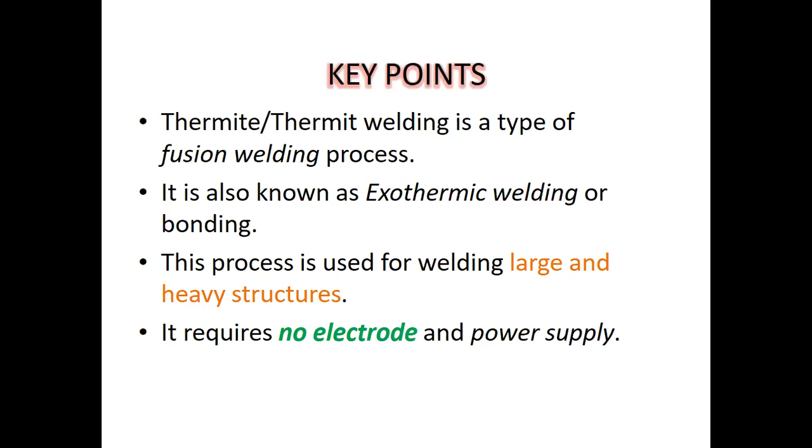The principle is, in this process, the welding is done by pouring superheated liquid steel around the parts that are to be joined. And that liquid steel is brought to that superheated state because of the thermite reaction. That is the first point to note. A short moulding process is to be done before welding. We'll see how that wax molding is done.

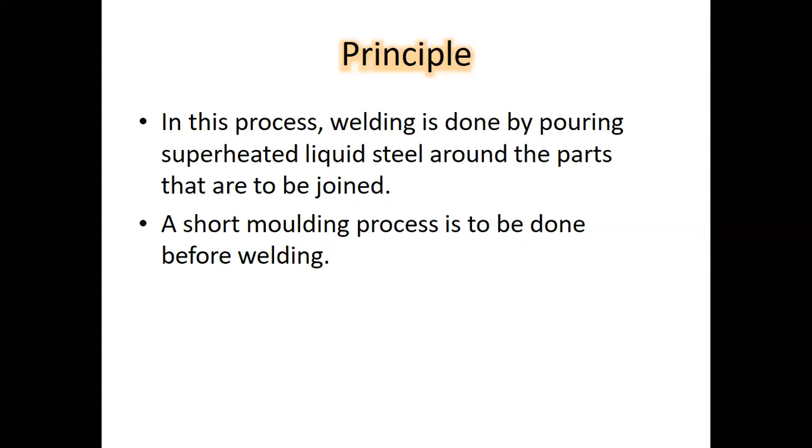The exothermic reaction is from a mixture of fine aluminum powder and iron oxide that produces a very high temperature on combustion, used in welding and for incendiary bombs. That is what is responsible for the generation of heat and therefore the high temperature. If it involves aluminum, the thermite reaction is also called the Goldschmidt aluminothermic reaction. Usually this reaction is triggered by burning magnesium ribbon in presence of barium peroxide. So the ignition material is magnesium ribbon in the presence of barium peroxide.

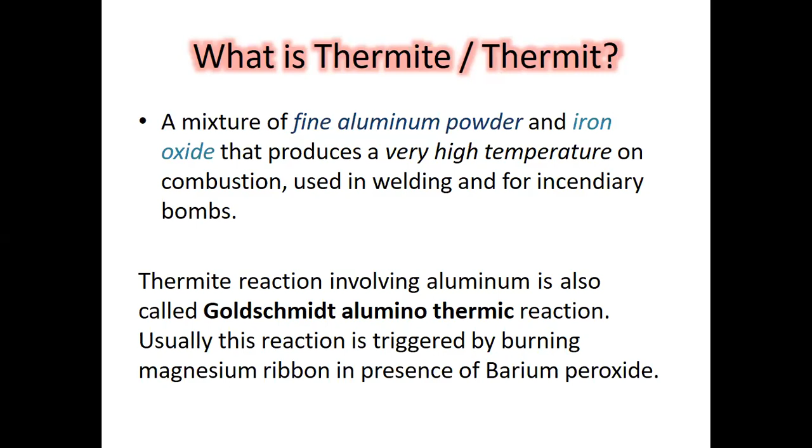As for the composition, you have by weight 75% of iron oxide and 25% of fine aluminum powder. That's the ratio, 1:3 by weight. We can also use copper or chromium instead of aluminum. Those are also possible.

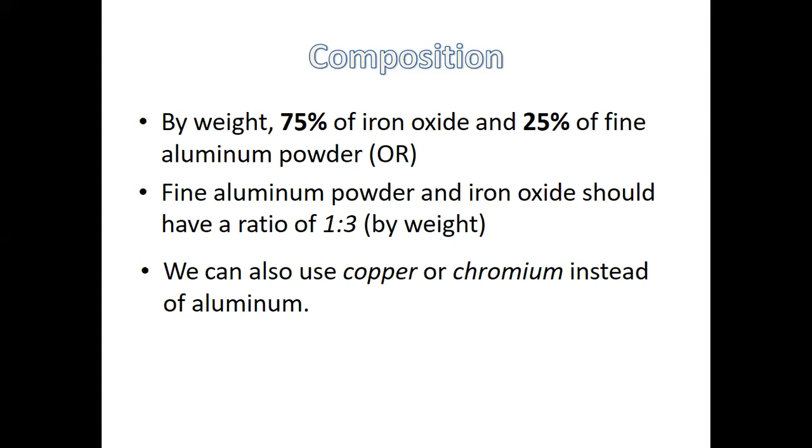As for the working, the ends of the parts to be joined are kept parallel with a uniform gap between them. For example, two rails to be joined will be kept side by side. We'll see in the next diagram that those two entities are kept right beside one another, and a uniform gap is maintained. Now that gap is filled with wax, which becomes the pattern. Molding sand is rammed around the wax pattern, and the pouring gate, heating gate and risers are cut. Once that wax comes out, the gap remains and will be filled with the molten metal.

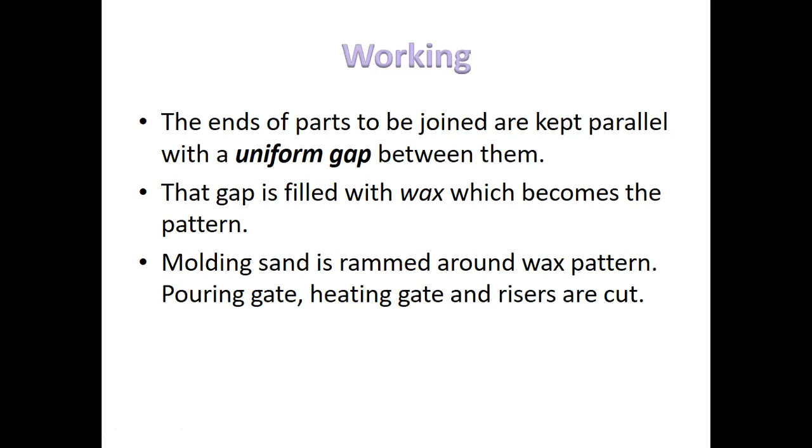You see here, this is your crucible, from which the superheated molten metal will flow in through the tapping pin. And this setup you have prepared is around this, which is to be welded. These are the sections to be welded, basically rails.

We're looking at a cross section of it. So if the weld is to be made around this section, then you have to have a mold right around this section. So you are trying to make these cavities so that the molten metal is given way to fill this space, and then the riser, just as we have in the casting, right? So we are trying to give it all the channels that are required, as we have seen, starting from the pouring basin, runner, gate, riser, etc.

And before that, you have this preheating gate, wherein using a torch, you are trying to preheat the setup, right? So that when this molten metal, which is at a very high temperature, enters here, there is a temperature gradient, and that would lead to cracking, etc. of the base metal. So to avoid that, with a preheating gate, we are trying to preheat the setup before the molten metal is poured in.

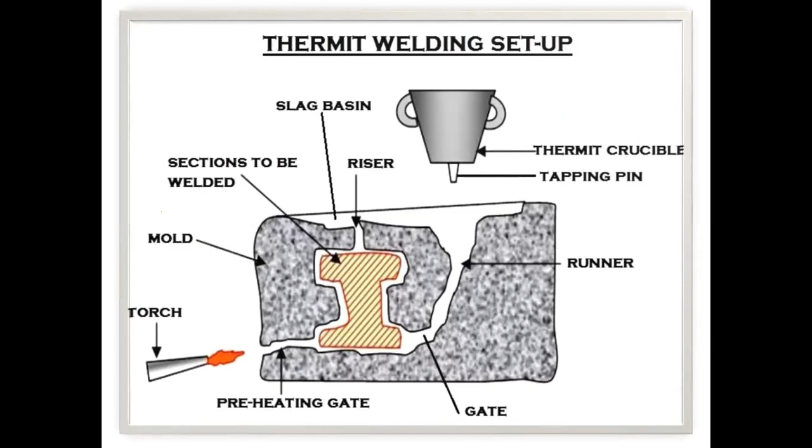Now, after the melting of wax, the weld joints are preheated due to flame, right? Then heating is stopped and the heating gate is closed. And therefore, no other external source of heat can come in except the molten metal from the top, as we have seen here. Okay.

Now, as for the preparation of thermite, you see how that mixture is prepared. So that mixture of aluminum and iron oxide in the ratio, as we have seen, 1:3 is placed in a crucible. Barium peroxide is added to the crucible. Barium peroxide arises by the reversible reaction of O2, that is oxygen, with barium oxide. The peroxide forms around 500 degrees centigrade, and oxygen is released above 820 degrees centigrade, right?

And the mixture is ignited using a matchstick or small magnesium wire. We'll see in that video hopefully that using either a matchstick or magnesium wire, to be able to ignite that mixture, you have to have some source. So that combustion takes place in the crucible. Due to combustion, thermite mixture becomes superheated liquid within a maximum time of 30 seconds. So that's how quick that combustion is, right?

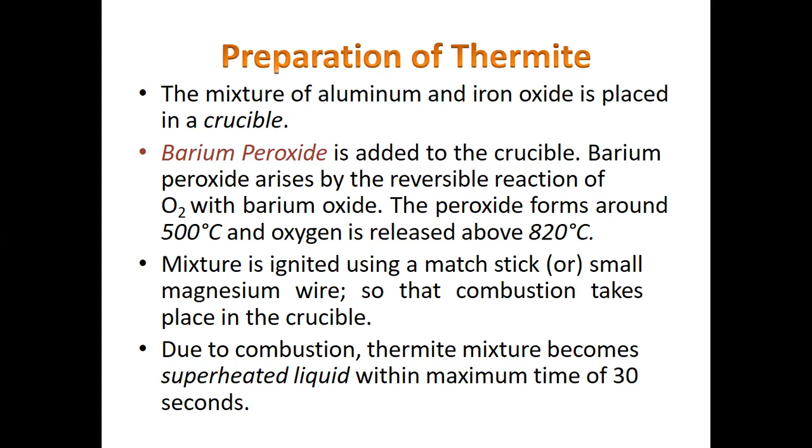That superheated liquid, which is pouring metal, has a temperature of around 2500 to 3000 degrees centigrade, or 5000 degrees Fahrenheit. The reduction of ferric oxide by aluminum is highly exothermic, and therefore the iron formed will be in the molten state. And aluminum is chosen as the metal since it has strong affinity towards oxygen, and its oxide, Al2O3, as we have seen earlier, is a highly exothermic compound. That's the reaction that is taking place.

And aluminum is reacting with this ferric oxide, right? That heat we are getting is actually our byproduct. That is our intention here, right? That heat is responsible for melting the base metal.

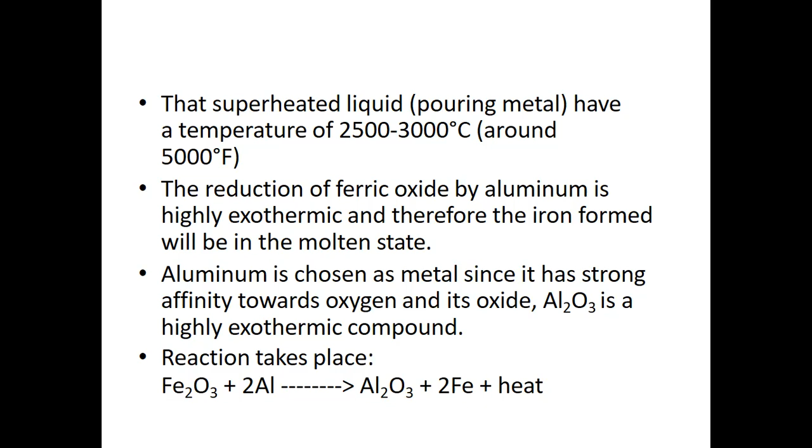As for the joining process, you have the crucible placed directly above the joint to be welded, as we have seen in the diagram. After preheating the joints, the liquid thermite steel from the crucible is poured into the mold between the gap to weld. The molten metal solidifies and the weld is completed. Once that crucible releases the liquid molten metal, it flows into that cavity we have created with molding sand, and it solidifies over time, and then the weld is completed.

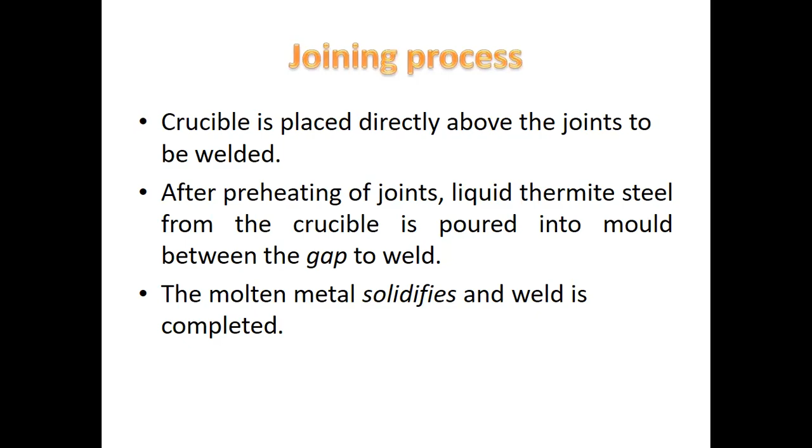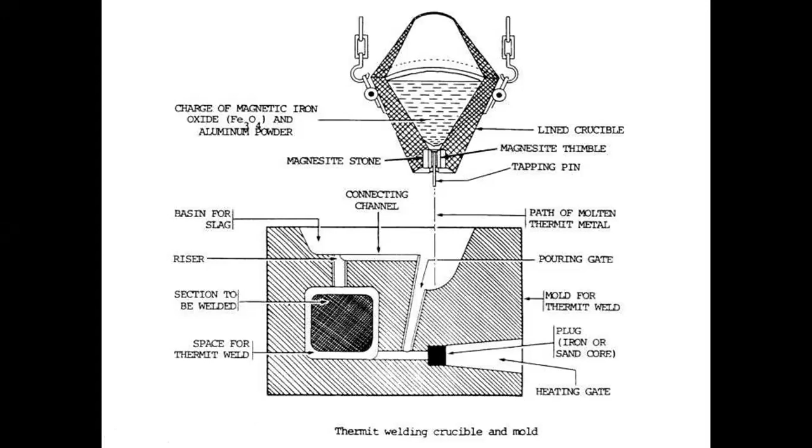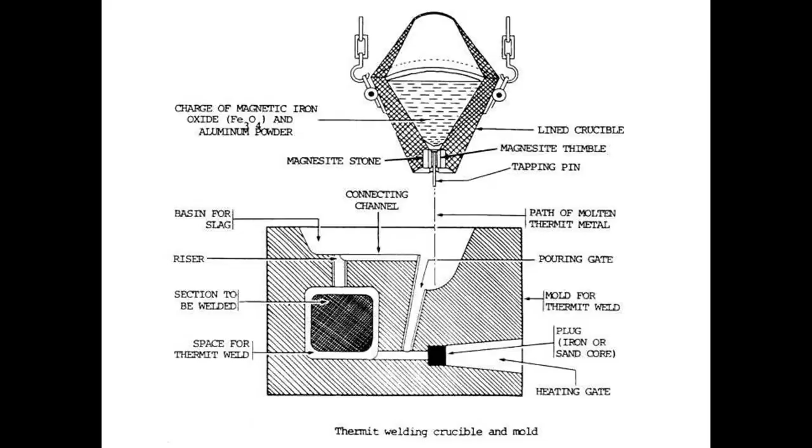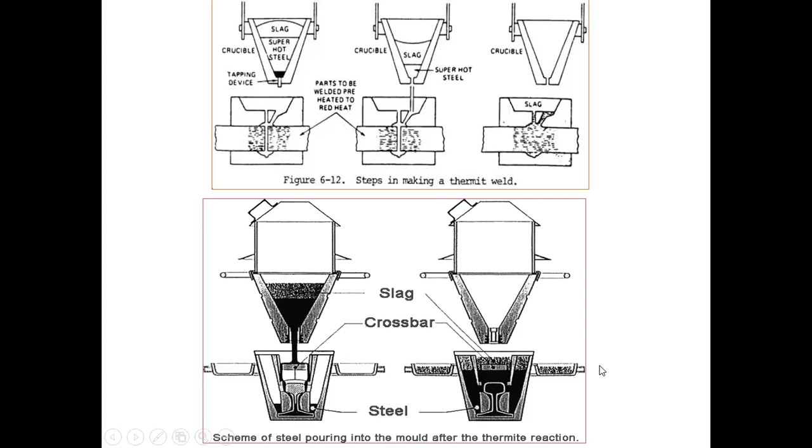As for applications, it is used to weld very large works. As we have discussed earlier, joining of rails is one example, pipes, even broken teeth on large gears, for example, those dam gears, if you have seen, they're quite big, right? So if there are broken teeth on those large gears, how do you weld them? With the help of thermite welding. Large framework also, like big structures, architectural structures.

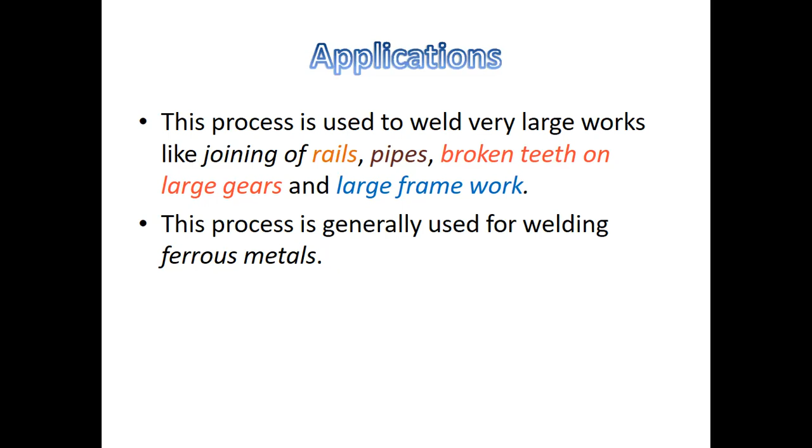This process is generally used for welding ferrous metals, right? Because the exothermic reaction that we have is able to achieve that temperature wherein the ferrous metal can be melted, right? So that comes off as a positive point. Advantages: as we have discussed, very large structures can be easily welded, which is not possible with other kinds of welding, right? You require more time and more filler metal. So here you are trying to compensate for that.

No power supply and electrode needed, as we have discussed. So this is very much suitable to be utilized in remote applications, remote areas wherein there is no power supply or it is very hard to get any electrode that is to be carried.

Disadvantages: skilled laborers are required here because it's a very tedious process. Manual, we can call it, it's not automated. So therefore skilled labor is required here. And it's a time consuming process, right? Very lengthy process. You have to prepare the mixture, you have to burn the mixture, you have to prepare the molten metal, and then you have to prepare all that setup here at the weld site, right?

All that gating system of, what do you call this, runner, gate, etc. And then once the molten metal is done, you have to pour it and then wait for it to solidify and then remove all that excess gates and runners, etc. once the weld is done, right? So it's a time consuming process. Doubts so far?

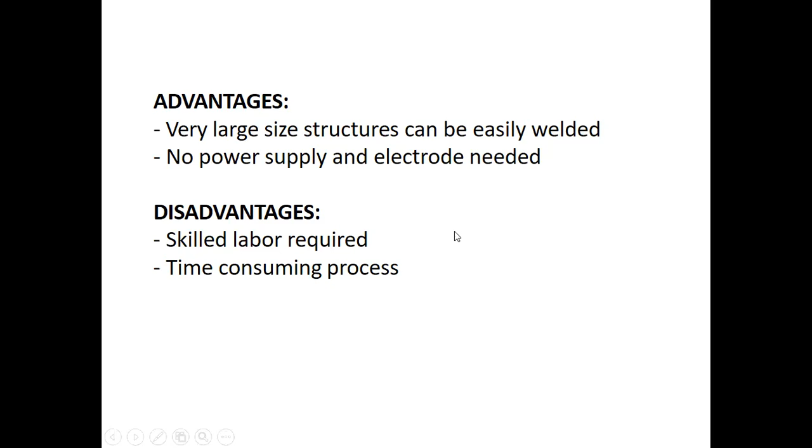Okay. Now let us have this video so that we can understand this process.

Able to hear the audio also? Okay.

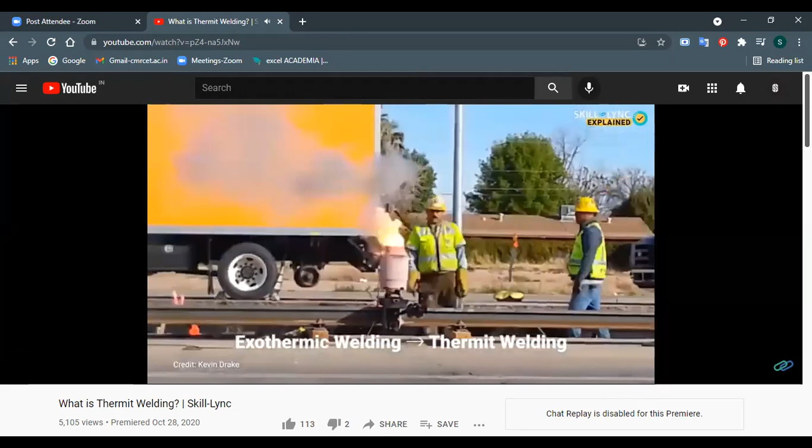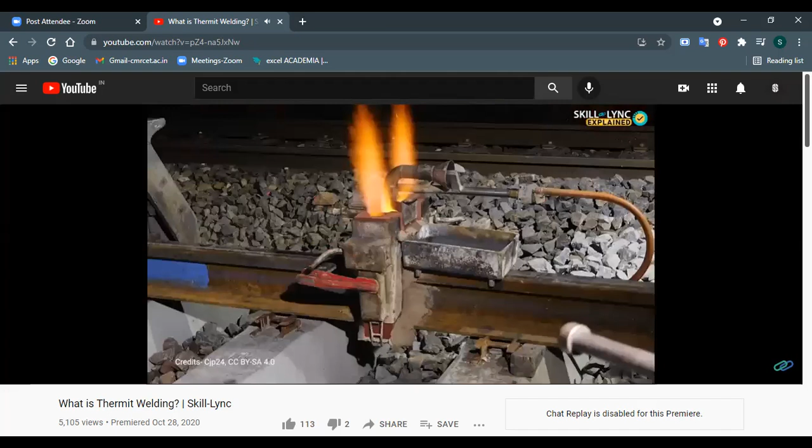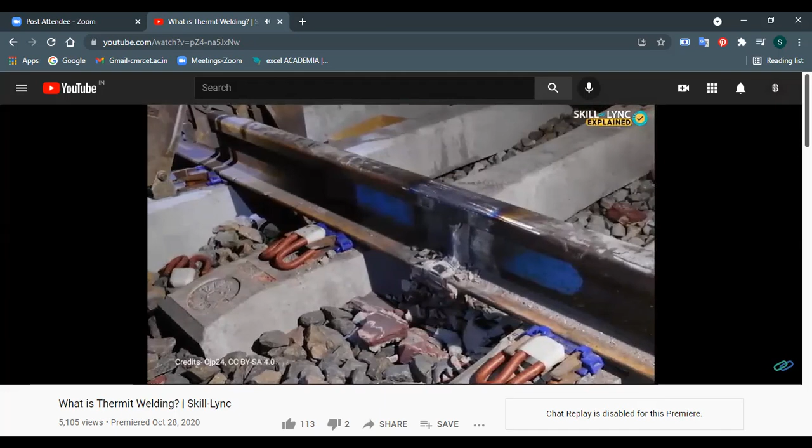Shielded metal arc welding is called stick welding, while gas tungsten arc welding is called TIG welding. Similarly, exothermic welding is called Thermit welding. Thermit welding is a type of welding procedure which uses molten metal to join two thick bars of metal. Thermit welding is most commonly used in welding two separate rails in train tracks. Unlike most other processes of welding that we've discussed up until now, Thermit welding does not use any electricity for welding. This makes it suitable for welding work at remote locations.

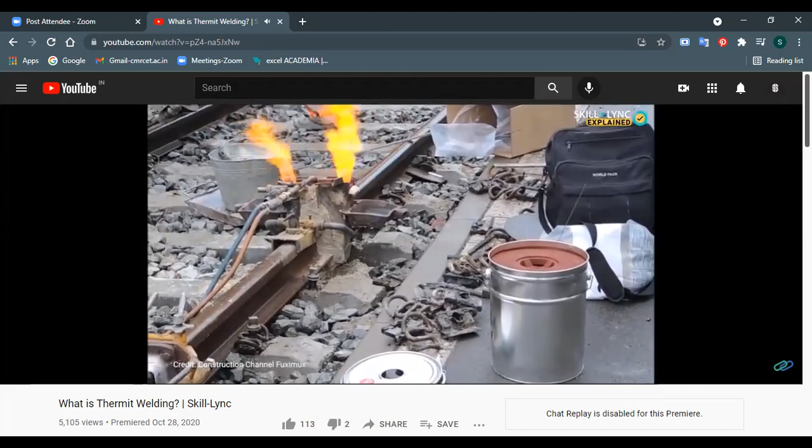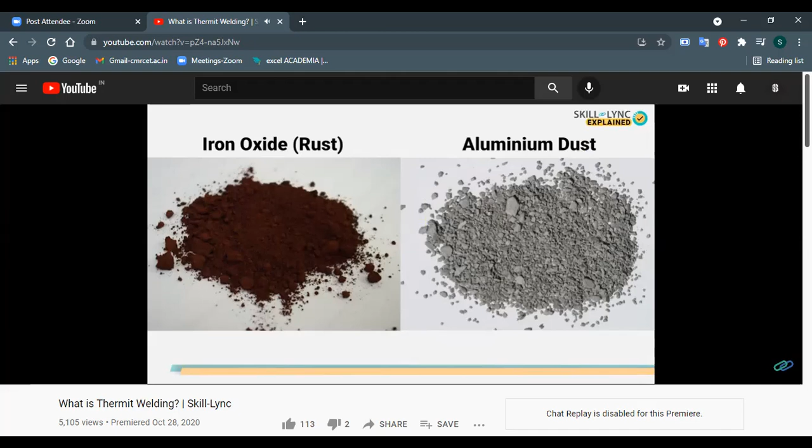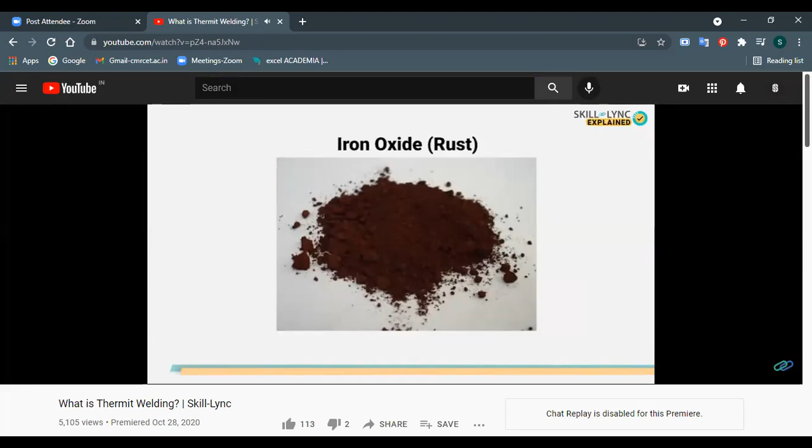The heat required for welding is mostly created by exothermic chemical reactions. The most commonly used exothermic reaction involves aluminum dust and oxides of any other metal. Aluminum dust reduces the oxide of another metal as pure aluminum is highly reactive. The most common reactant is rust, which is also called iron oxide. When this mixture is ignited with heat, the components undergo a redox reaction. The oxygen from iron oxide splits and joins pure aluminum to form aluminum oxide. During this process, huge amount of heat is generated.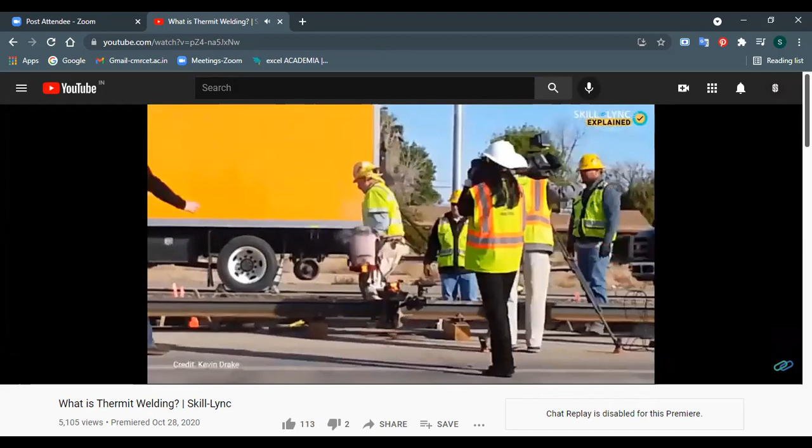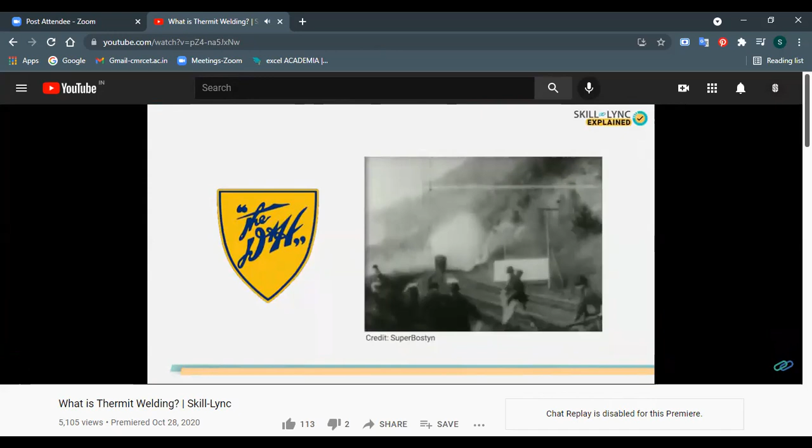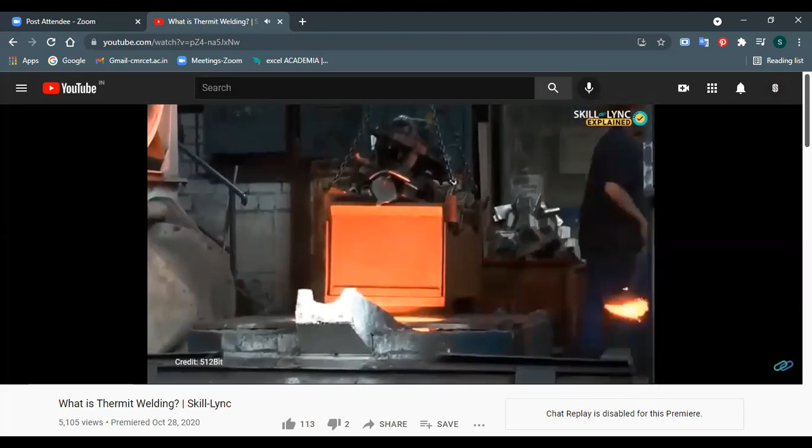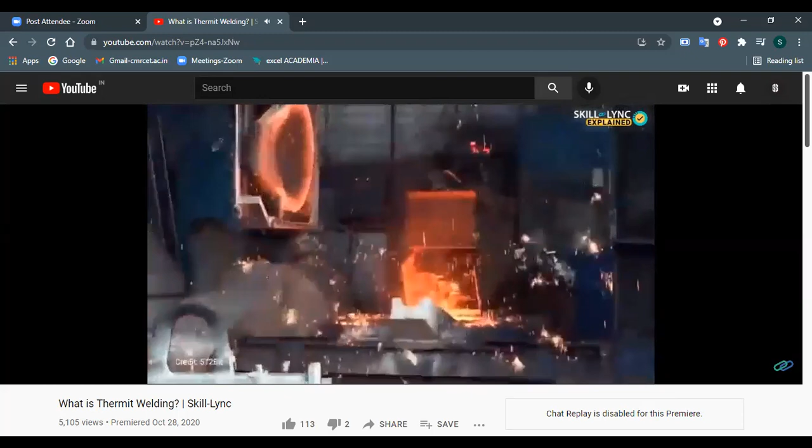One of the first railroads to identify and use thermite welding was the Delaware and Hudson Railroad of the United States in 1935. The weld quality of chemically pure thermite is low due to the low heat penetration into the joining metals. Another drawback of this is that pure iron is used to fuse two rails together as opposed to strong steel. To avoid yielding pure iron, a few pellets of high-carbon alloying steel are added into the thermite mixture.

To get a proper railroad weld, the ends of the rails being welded are preheated with the help of a gas torch till they start to glow in orange color. We have discussed gas welding, right? The torch of that gas welding is what you're seeing here. You see those two pipes, they are being connected to two gas cylinders.

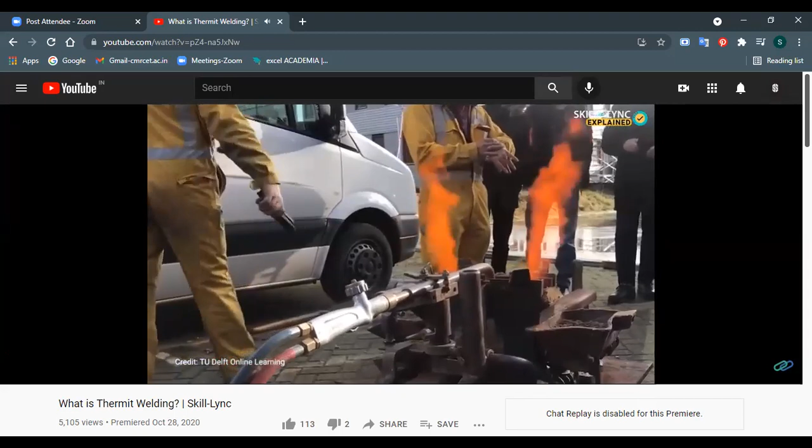Acetylene, for example, if they're using acetylene as fuel gas, the other thing is oxygen. So those two pipes or hoses are combining to this torch, which is responsible for preheating, right? So gas welding comes in handy here for preheating. Okay. This is done to ensure that the molten steel from the thermite cauldron is not chilled instantaneously on touching the cold rail tracks. The welding process is as follows.

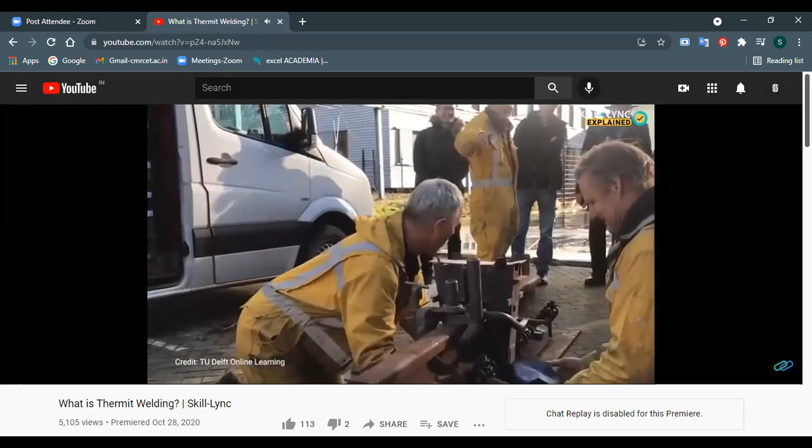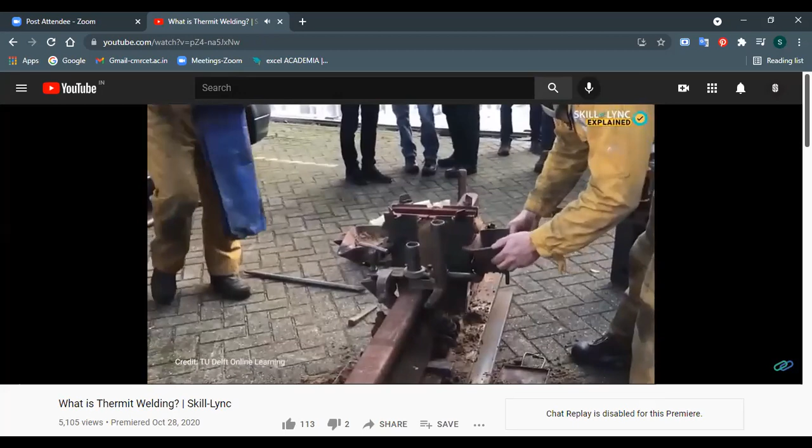A gap in the rail track is identified. Two mold clamps are placed on either side of the rail, just above the gap in the rails. The entire mold is then sealed properly with packing sand to prevent leaking of the molten metal. Slag basins are provided on both the sides of the mold to collect excess metal and prevent overflow.

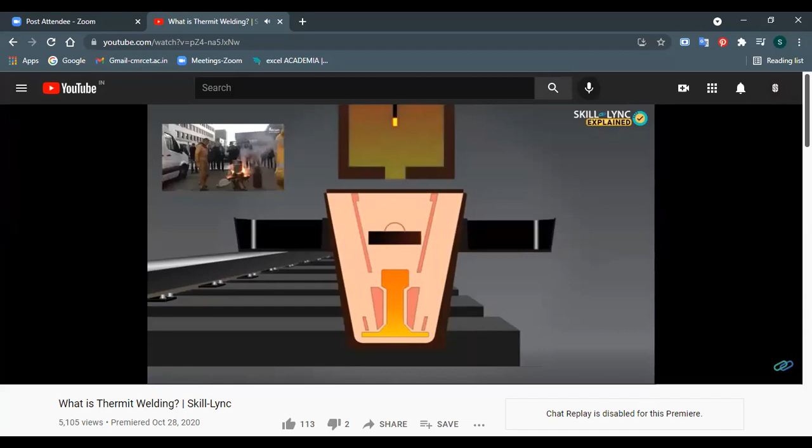The entire thing is then heated with the help of a gas torch. They are heated till they become red hot. A metal container or crucible is then placed over the mold. This container is filled with thermite. The entire mixture is then ignited, which causes a rapid exothermic reaction to occur. The heat causes molten metal to flow through the mold and settle down on the slag basin.

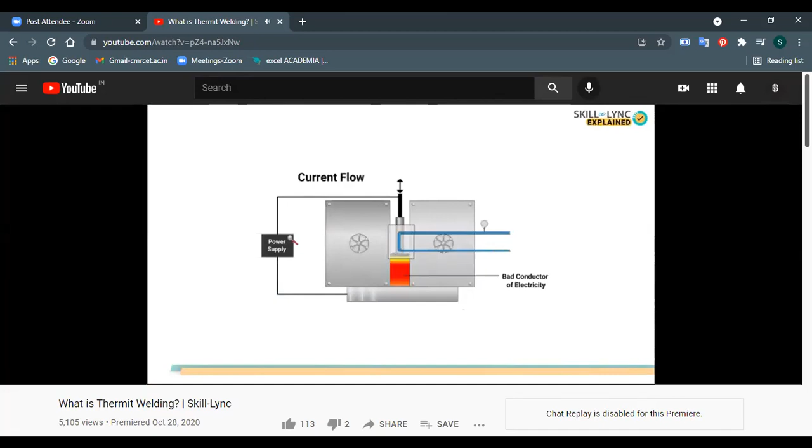Once the exothermic reaction in the crucible settles down, it is removed. The packing sand, slag basin, the mold, and the clamps are all removed. The main reason why this procedure is used in rail tracks is due to the remote location of rail tracks. The same welding work can be done with electro-slag welding too, but carrying all the bulky equipment around for long distances is not very feasible. Finding a suitable power source is also a hard thing. This is the reason why thermite welding is preferred in this case.

Right? Doubts from that video? Okay.

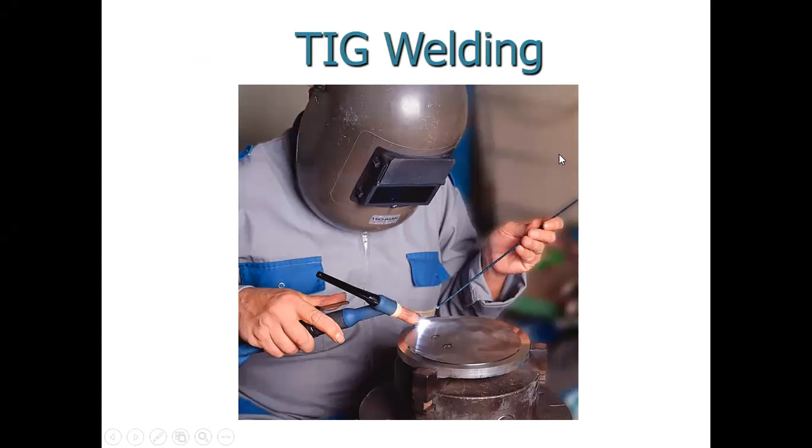You see, the next type of welding is TIG welding. Okay, the full form is tungsten inert gas welding. So there's this inert gas. We'll see why it comes in the category of inert gas welding. Tungsten because the electrode that we are using is made of tungsten, and inert gas because we are trying to use inert gas for shielding the weld area, right?

You see, also referred to as GTAW. What is GTAW? Gas tungsten arc welding. Okay, this is also known by this name, and we will call it GTAW or TIG welding. Both are fine.

So in TIG welding, a tungsten electrode heats the metal, and shielding gas, most typically argon, protects the weld from airborne contaminants, right? As we have discussed, the electrode is made of tungsten because it can withstand very high temperatures, right? It will not melt at lower temperatures. So it can bear high temperatures, and it is stable also. And shielding gas, most typically argon, protects the weld from airborne contaminants, as we have seen. That's the role of the shielding gas.

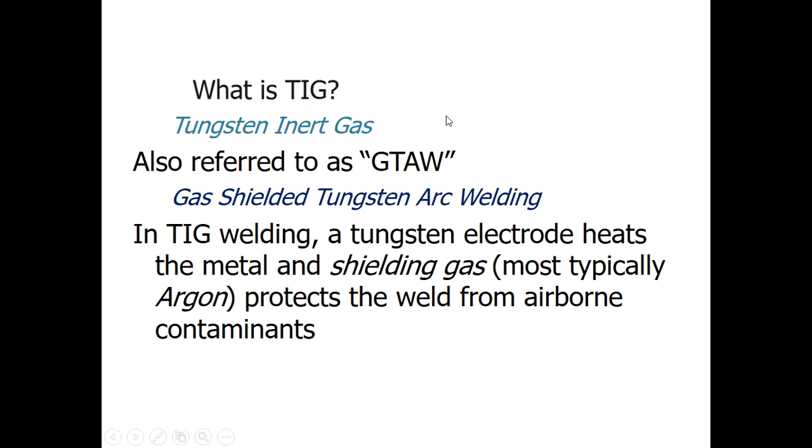You see, TIG welding uses a non-consumable tungsten electrode, right? So that tungsten electrode is not being consumed. It is only responsible for generating the heat. Another filler material would be supplied, and that is what will melt. The filler material will melt due to the heat generated by the tungsten electrode. So once that filler metal melts, it will settle down at the weld area, and that is what is responsible for creating the weld.

So it is very important that we mention it is a non-consumable tungsten electrode, because tungsten is not being consumed in the process. Filler metal, when required, is added by hand, as I said. Shielding gas protects the weld and tungsten. It protects the weld area and also the tungsten, because when it is at a high temperature, it is bound to undergo oxidation, etc. So that is also avoided.

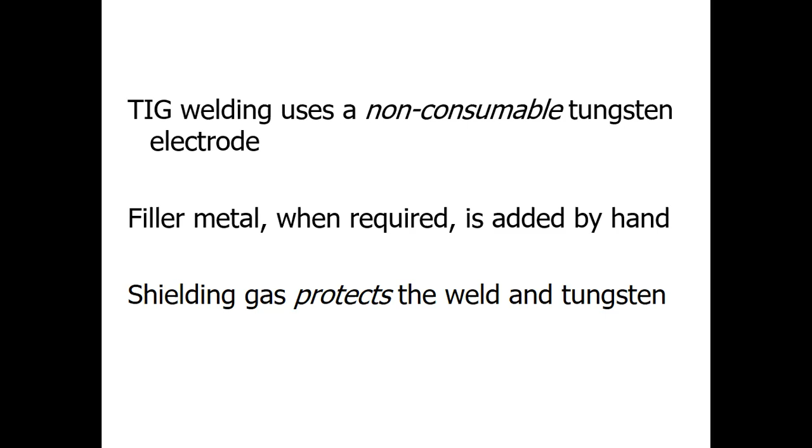As for the setup, if this is your workpiece that is to be welded, you have the TIG torch, the tungsten inert gas welding torch. This is connected to your power supply, and as we have discussed, the other end, the welding return, is connected to the workpiece. So you have positive and negative terminals. This power supply is responsible for increasing the temperature of the tungsten electrode, so that the arc is generated because of the power source.

And shielding gas supply is done with the help of a cylinder, as we have discussed. Inert gas, it could be argon or helium, etc. And the mains supply, of course, which is responsible for generating this power here, and therefore the current.

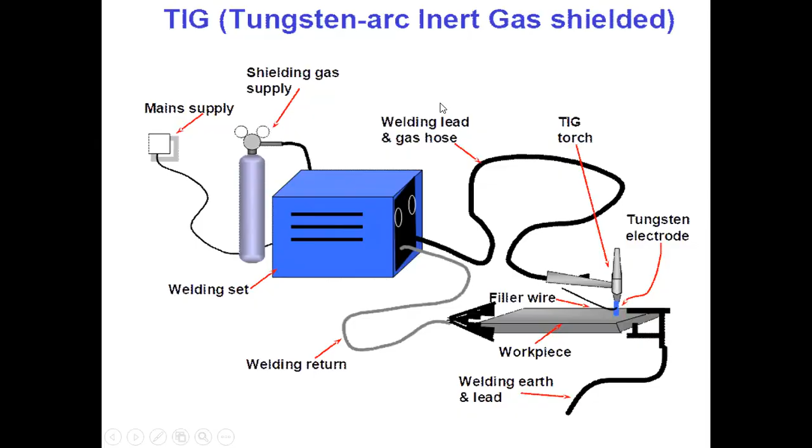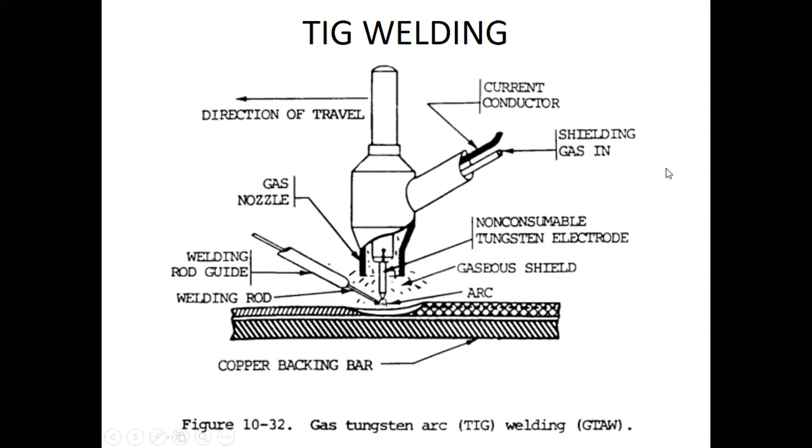As for the advantages, it welds more metals and metal alloys than any other process. It is quite a precise process because the arc is directional and it can achieve higher temperatures while being stable. Stability is another reason, because of the shielding gas. There's no formation of oxides and other contaminants, so it is able to weld a wide variety of metals and metal alloys.

No sparks or spatter. There are no sparks, as I said, and therefore no spatter. Basically, the molten metal would not disperse here and there. No flux or slag. We are not using any flux, so no slag is formed. No smoke or fumes. For example, in arc welding you will have a lot of fumes, but here, no such thing.

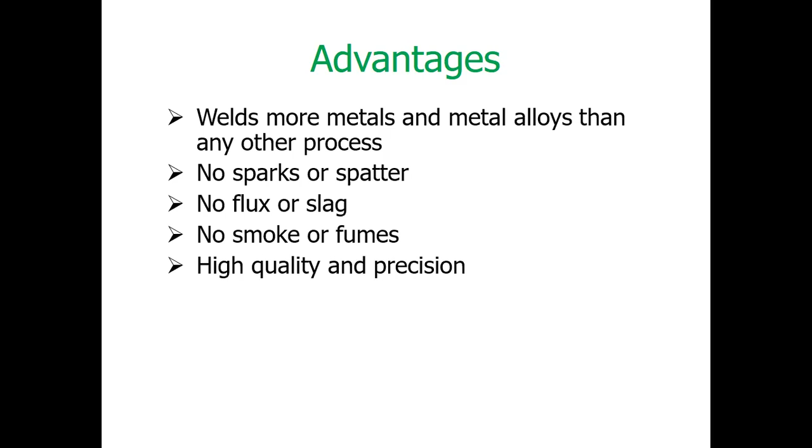And high quality and precision work. This is very much suited for creating precise welds, and in the aerospace industry TIG welding is more common, because it is able to achieve higher quality welds and is also precise in terms of dimensional control. Pinpoint control: as I said, you have more control over the weld quality and the dimensions.